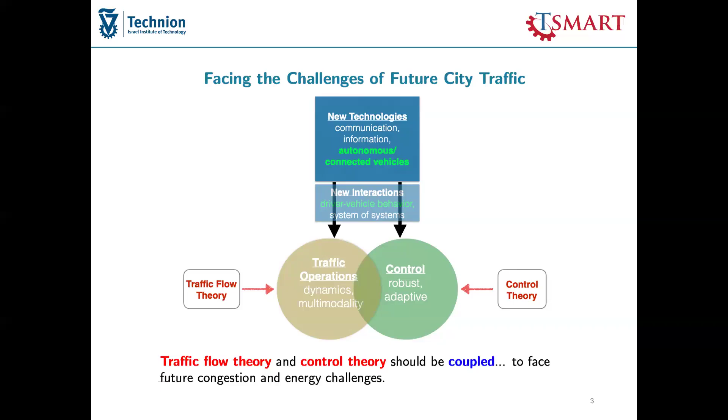And with these new interactions, we are expecting to rise some systems which are very complex, what we call system of systems. In our lab, we want to face these challenges of the future city traffic by combining two things, the traffic flow theory and the control theory, by developing some models describing more multimodal dynamics, and to introduce some control strategies which are autonomous, robust and adaptive.

How do we do it? This is our research vision. So we distinguish always between two levels, the network level and then the lower level, in a hierarchical scheme. So first we deal with the network level and then we go to the lower level. And at each level, we have the closed loop. Of course, everyone knows what a closed loop is. So we have the models, the monitoring, estimation, and the control strategies, etc.

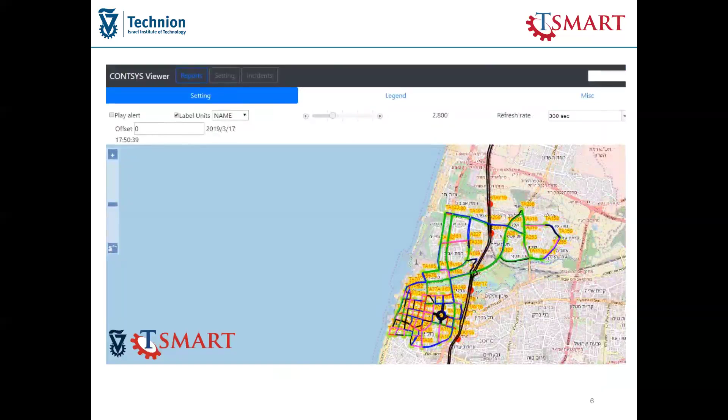In order to do this, we need data. So we initiated a real sensor network in Tel Aviv. We installed 100 Bluetooth sensors, and we collect the data. We send that data to the Borovich building, where we have a system that collects the data, and we can utilize this data in order to build a micro simulation of the network of Tel Aviv, and then calibrate it with this Bluetooth data.

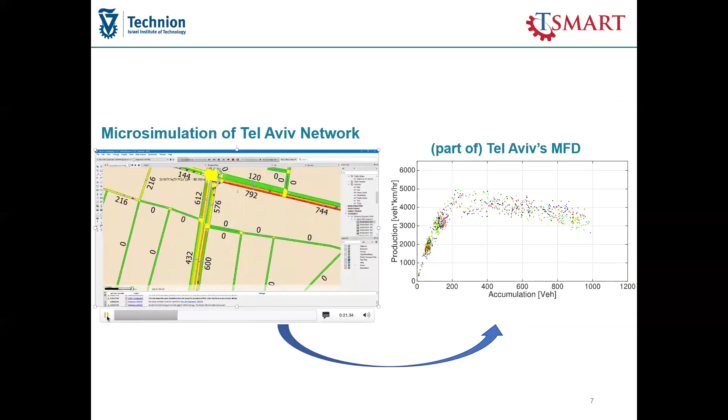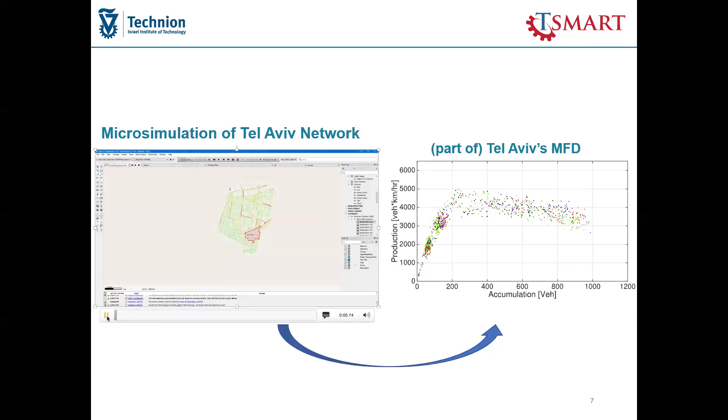Finally, we end up investigating at the macro level the relation between the vehicle density, the number of vehicles in Tel Aviv, and let's say the average flow in the city. And this nice graph shows you that as you increase the vehicles, of course, the average flow increases in the city of Tel Aviv, but after a while you have congestion, and this will decrease the productivity of the city. So with such modeling, you can do some control.

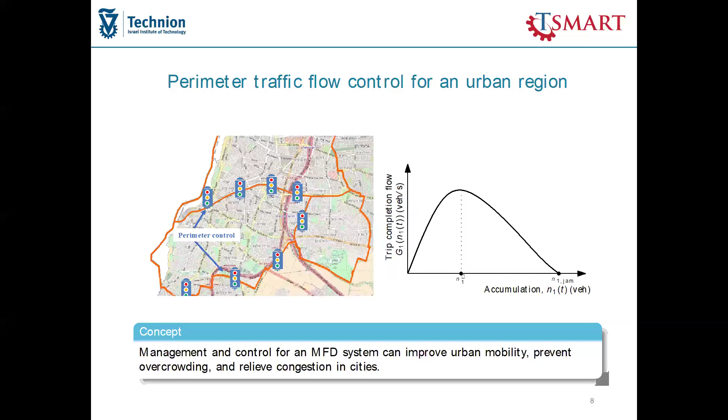For example, this is perimeter control. You can coordinate between the traffic signal lights on the border of some region in order to meter the flow entering the region, such that you can regulate the number of vehicles around this set point in order to maximize the flow.

And eventually, you end up comparing without smart strategies and with the smart strategies that we develop, so that you can protect the city. And this is what, in the next year I think, they will do with the toll of Tel Aviv. When you enter, you need to pay 25 shekels per day. So this is a type of strategy that can be implemented in order to protect the city and to have less congestion in the area.

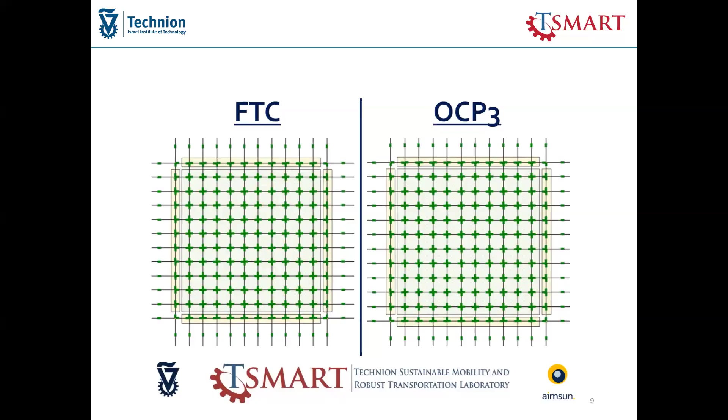Now, what's wrong? Okay. It got stuck. Oh, sorry for that. Okay, so this is at the macro level. No. That's it. Maybe I should not show the other one. That's it. Jump on slide. So it's this one.

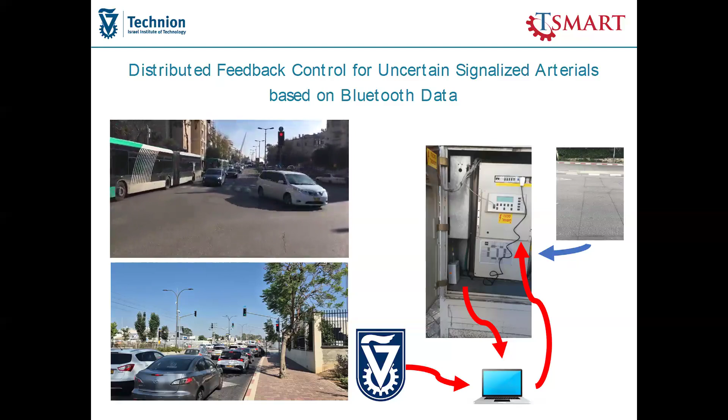Okay, yeah, that's it. So this is at the individual level, where you implement some new algorithms, because we installed the Bluetooth sensors here at the Bridge of Jerusalem, and here also when you turn right to go to the Technion. And because you have different types of sensors, Bluetooth and loop detectors, you need to develop new algorithms, and these algorithms are implemented for the first time in the world: how you can integrate Bluetooth sensors from mobile phones to estimate the traffic and to change the traffic lights in real time.

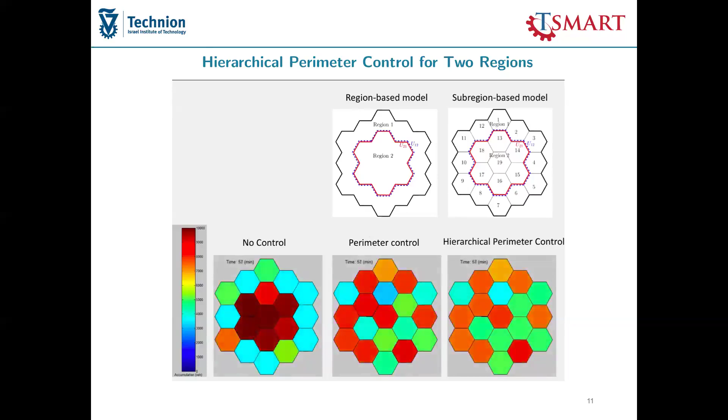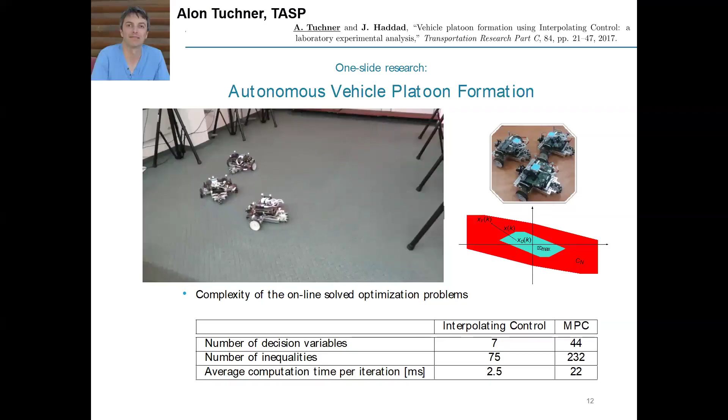Now, there is some other research in autonomous vehicles that we do. For example, there is much research that has been done on autonomous vehicle platooning. In our lab, we are considering some state-of-the-art algorithms, mostly theoretical algorithms in the literature, in order to see if they work in the lab, in order to decrease the complexity of online optimization. And this is one of the TASP students in the past.

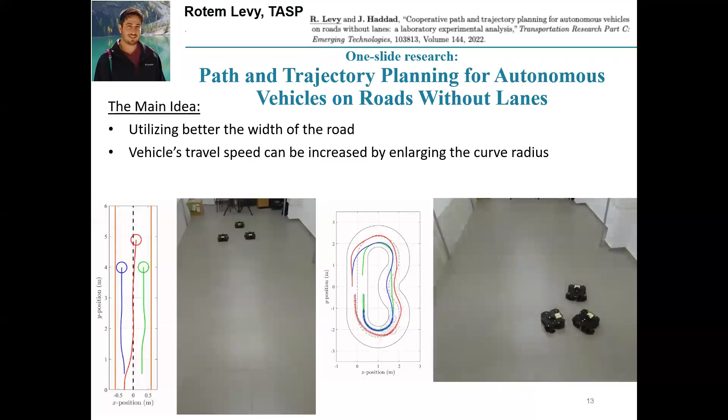Another TASP student imagined that in the future you have roads without lanes. So imagine that now these are roads with 2 lanes. You don't consider the paint of the lane channelization in the road. And then, because it's the future, if you have autonomous vehicles, you can better use the width of the road. And also you can take a larger curve and you can increase it while you are moving.

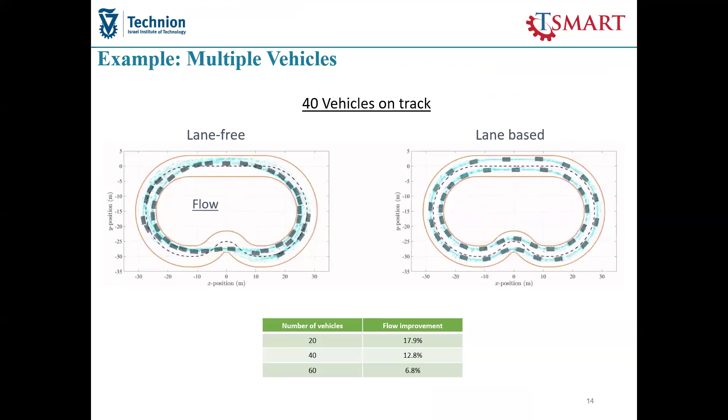Once you do that, the question is how this will affect the transportation network. And we see that we can get, depending on the scenarios, depending on the settings, etc., between 5 to 20% improvement in traffic flow and capacity only by changing these simple rules, deleting the lanes.

Now, I will make it short. For the last 4 years, we have been doing a huge project with Google, the Green Light project. And here, we did an automated system for traffic signal optimization. So it's like Waze, we collect the data with the probe data of Google that you are using. We can estimate the performance of the system. We can estimate all the traffic signal lights at the intersection without any data from the city.

And once we have all this data, we send an email to the city suggesting modification of the traffic light. Increase green here, decrease green there, and you can improve the system. All this is automatically done and has been implemented in more than 100 experiments all over the world, with the main focus of Google Research on CO2, to decrease the emissions. This is a nice project.

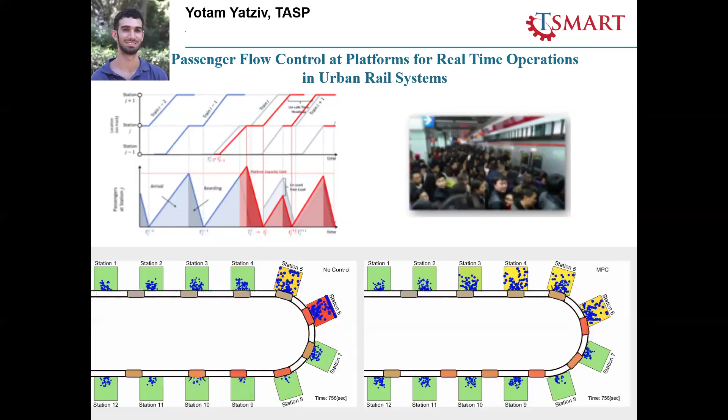Another project that we did with another PhD student, Yotam Yatziv, TASP is how we do a safer urban rail system where we control the passenger flow at the platform with autonomous trains. So this was nice, showing that with control, you decrease the number in the stations in order to make it safe, but still maximize the throughput.

Cyber attack, we are from Israel, of course. We need to consider this, and we have several papers on how we can do a robust system for traffic signals under cyber attack.

And then the last question, what about the coffee? Because I didn't really care about coffee. I just registered now for barista. So this is, again, the same, except that the drone will bring coffee to you, to utilize your time in a better way. But this is not 2050.

It's already in China. And we are in the middle of a park, and we are about to have some drinks dropped off by a drone. I have never experienced anything like this. So the delivery has landed right in there. Oh, sure, brought my Starbucks to me in the park. All I need to do is type the last 4 digits of my phone number and I should be able to get it. Let's have a look.

So there are other labs that take into account the space for landing, etc. Oh, the special delivery box is pretty cool. Okay, but we focus on drones in terms of... this one is not working. Yeah, this one is not working.

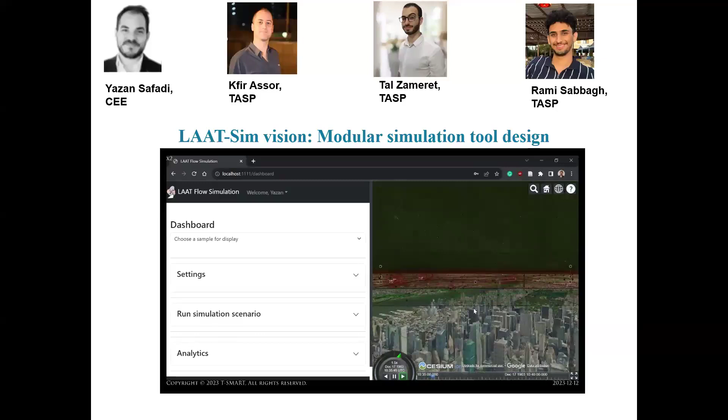We end up with simulation tools to help transportation engineers determine where the vertiports are and how this affects the delays waiting at the vertiports because the sky is congested, etc. This is long-term research, but we are on it. So please join us if you'd like more research, and sorry for the time.